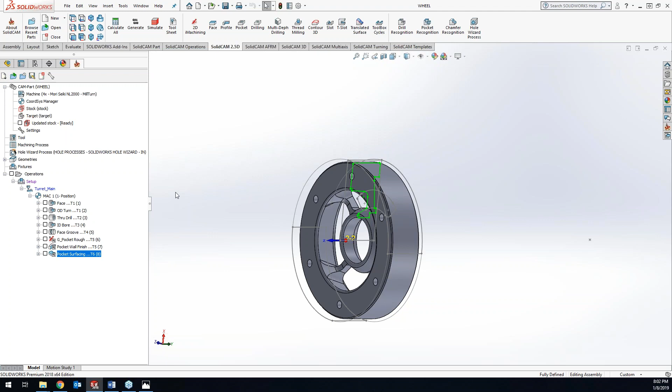Hopefully you guys still remember this part. What we did so far is we did everything on the main turret for the Mac 1 Pos 1 here, getting all this material out. I'll just do a quick run through here.

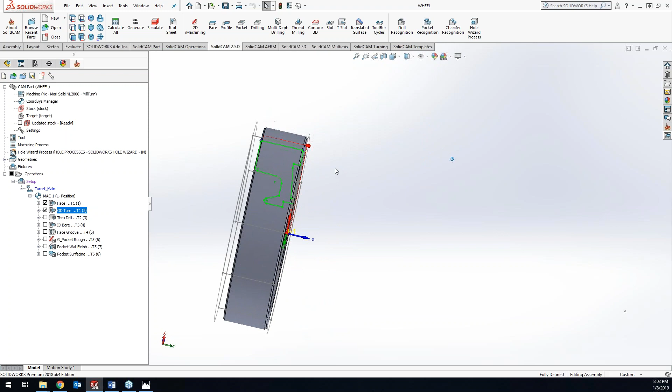We just did a basic facing operation, facing off our part. We did an OD turn around the outside. Let me get my part panned around here so you guys can get a better view. So we got the front face, OD turn. We're doing a through hole, and then we bored out that through hole.

And then what we did, let me pan this part just a little bit to the side, is we roughed and finished this counter bore, I guess you'd say, right here, using our face grooving. And then we did 3D iMachining, getting all the material out of here.

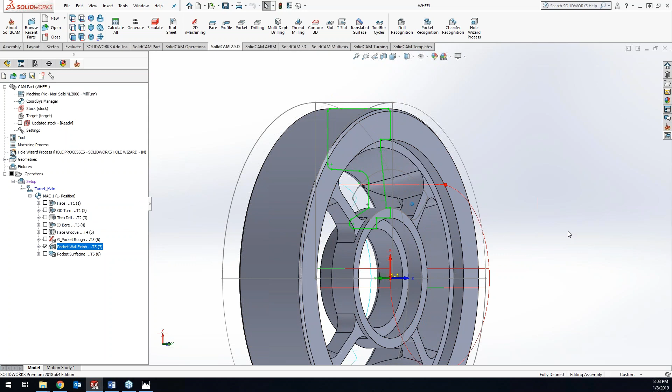Let me uncheck all this here. And then we just did a simple pocketing operation, coming in here and cleaning up these flat walls that were on here. And then did some HSS and the surfacing, going back and forth, getting that 3D surfacing in there. So if we just do a quick simulate here, solid verify.

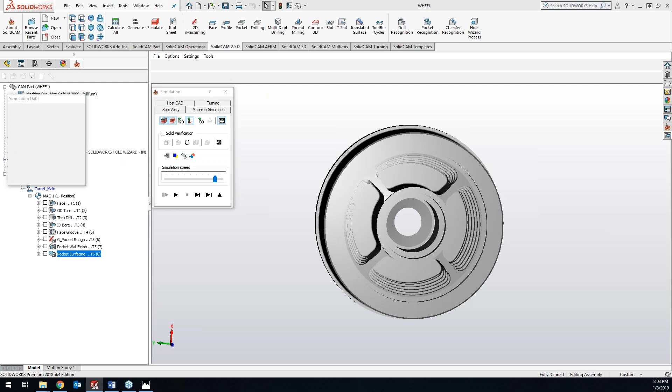Let me just check my accuracy real quick. We'll buzz through this surfacing real quick so we can see where we left off with. Hopefully everybody remembers this part.

And if they don't remember, the original video is on YouTube, right? Yes sir. Maybe we'll be nice and put a direct link in on this video to part one. That's a good idea, yeah.

I know last time we ran out of time, so we're to do the backside, so we'll get that all finished up for you guys tonight. Now...

While this is being played through, we had a great idea at IMTS. So what I'm going to start doing is implementing those ideas from Ronnie. I don't want to put you guys on the spot, but I want to put you guys on the spot. So I'm going to come up with maybe a simple prismatic part for one night class and a simple part for 3D milling on another night for a different class. And if I could have one of you guys email me that you'd be okay sharing your screen and showing your process of programming that, just so we can get a feel, you got Greg and myself, that both work at SolidCAM, but you guys are in the shop on a day-to-day basis.

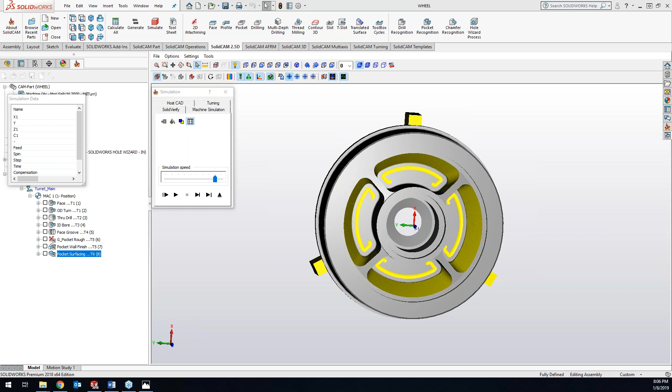Okay, so we got our part here, and we got everything finished on that front side. So basically, what we're going to be doing now is transferring it over, we can run that execute real quick here. So everything's that greenish yellow here, so we're right up to size, but we do have our blue now to take care of.

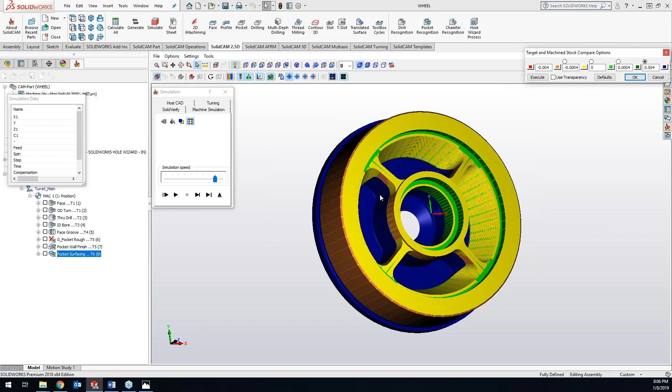So what we are going to do is transfer it over to our sub spindle. Greg, do you remember in our last class, did we set up a MAC 2 or jaws for that second side, for that second setup? I know it's been a long time. I don't believe it was, but it has been quite a long time. Yeah.

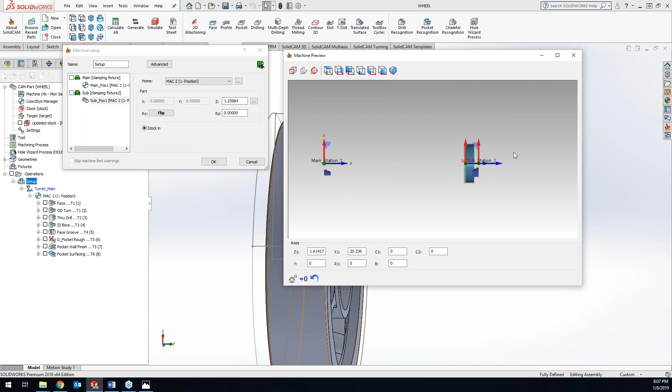So what I did, probably when Greg and I were in South Dakota, is I set up, I couldn't remember if we did or didn't, so I set up clamps for my sub spindle here. If I do a show, you can see my clamps over here. If I actually want to see the workpiece in there, I can come over here and say stock in, and this is basically what it's going to look like right here, of the jaws that I'm using and how I'm clamping onto that.

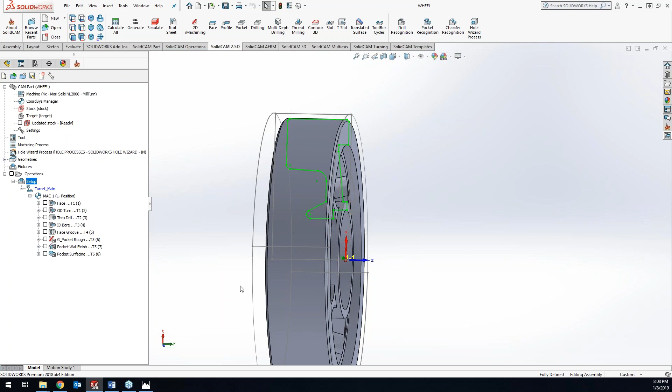Now, with that being said, let me put it back in stock for that main. Right now I only need one setup, because in my one setup I have my Mac 1 and my Mac 2 for my main spindle and my sub spindle. So what I can do is, a lot of you guys running these mill turn machines can actually create an MCO to transfer the part.

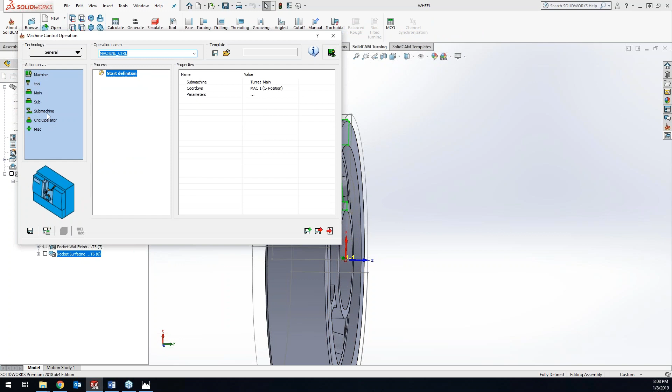Now, for those of you guys that do have mill turn machines, the MCO will probably already be in your list over here or up here, depending on how your post was set up, and the post writer would set up that MCO part transfer for you guys.

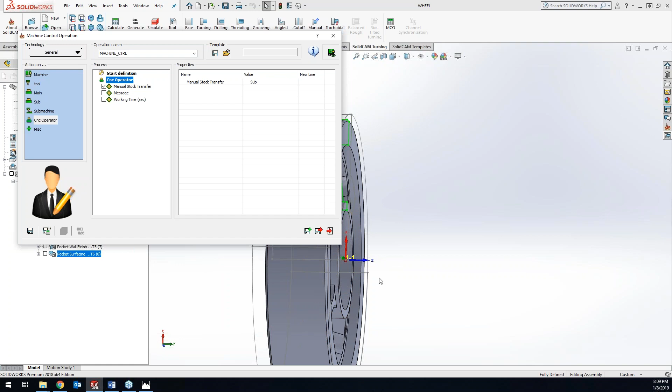So okay, so now we can just do save and calculate. So basically what that MCO is telling it is it's transferring the stock over to the sub spindle now. All right, so I haven't done this in a little while, getting out of breath here.

All right, so now what we can do is a facing, or we can do turning, doesn't really matter. And we will do it for Mac 2. So it's letting us know that it is sitting in the sub spindle.

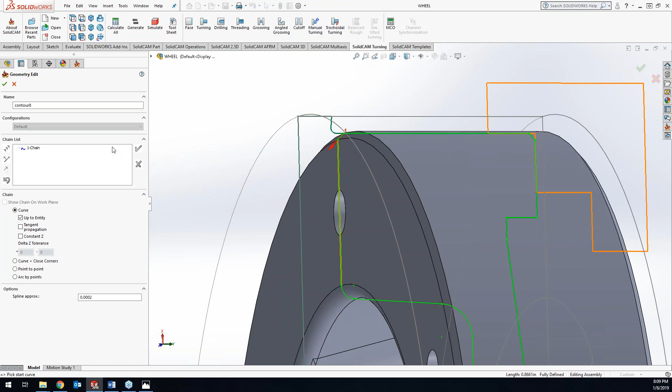And what I'll do here is grab this chamfer and straight down just to face off. Hit the green check mark. And I'm going to do my modify geometry and do auto extend to the stock.

All right, so now what we can do is create a new tool, and we'll do an external turning. I want to do a CNMG 432 C and G 4 2.

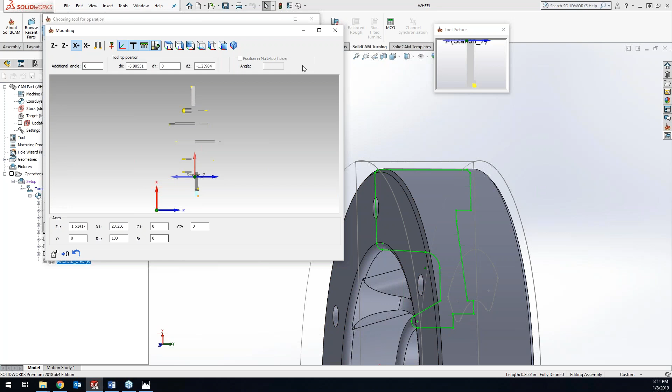And now I need to orientate it so it's going in the right direction. So I'm going to go to my mounting here and go like that. Hit our green check mark here.

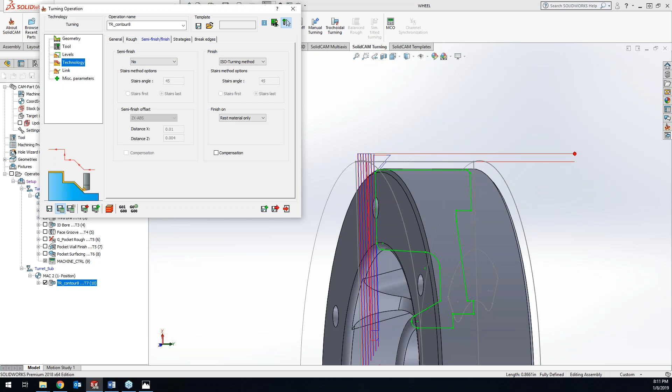Okay, so now we can go to our technology and we can tell it back face, and we can do a finish. And now should see a, whoop, well I'll show you here. I know there's one thing I just messed up on. Let's go to turning here.

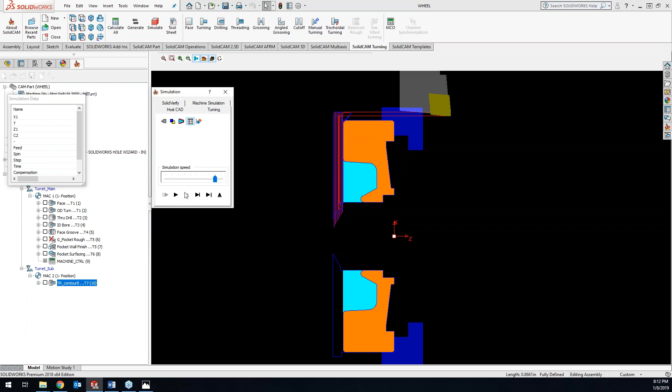And obviously, since I am working on the sub spindle, I don't want my tool coming over from the upper right corner. I want it coming from the upper left corner for clearance and whatnot. But that's an easy enough modification. Play this through here. And there we go. You can see we just wiped out our jaws right there. If we just do this in Solid Verify, yep, so that's a great indicator telling me that I've got my tool coming from the wrong side here.

So let's go to our link, and instead of right safety corner, I will do left. And now you'll see it come from the correct way, come over here and work its way over. What were we going to say there, Greg?

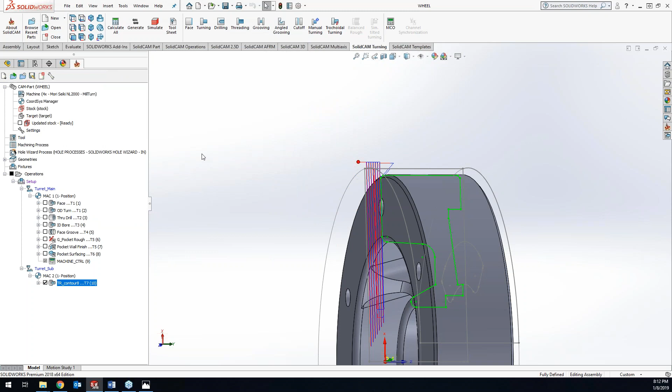What I would like to see is, since we get a lot of calls on people working on the sub spindle without that stock transfer, can you get rid of that MCO and just show everybody what it would look like if the stock hasn't been properly transferred to the sub spindle?

Excellent. So if you guys are programming and you see this square box show up, especially when doing mill turn, that means something isn't jiving with the operation list. Right now it's popping up, let me expand this so it shows me the error. It's basically saying it doesn't know where the stock is currently, the stock is not matching what the setup is up here. If you hover over the name, it gives you that contextual error message: stock is absent on this.

I forgot about that. So if you just hover over it, like Greg said, you'll be good.

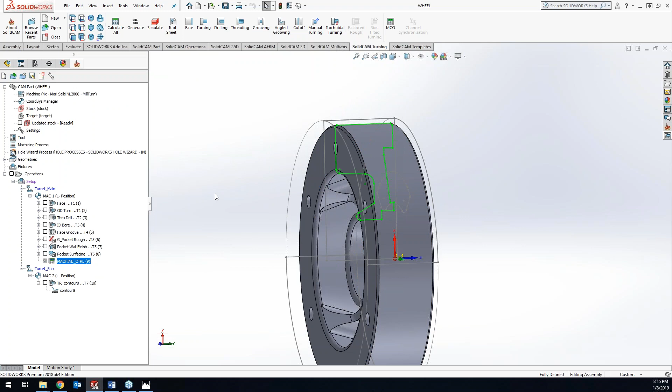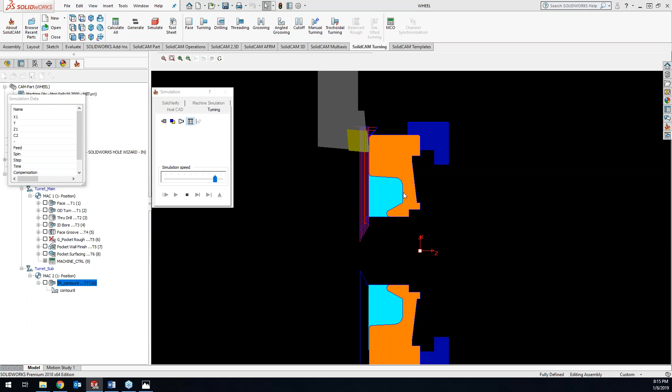Okay, so now let's see, I got to do a quick turning here to see what I have left. Okay, so I got to do my face grooving now. I got to get all this material out here, and I should be able to get that out all with one tool here. But let's try it.

So we'll do a grooving operation here, doing our Mac 2, and we'll do new. Like what we talked about in the past, the dark green line is my stock, or my remaining stock that I have left over. So what I'll do is chain from right here and chain up to right here, so I'm going to get that rest material out of there.

Okay, and go to our tool. We will use an external grooving tool, let's just do a 0.125. That looks fine. Let's just do 100 thou. Looks good, good, good. And let's just do insert only. And we want pointing the opposite way.

So you can see up here, I can see my insert much better now. And like I said before, if you guys have a whole lot of tools in here, it gets pretty cluttered up pretty quickly. So you can actually just hide all the tools, and then you can zoom in and you can actually see your insert and which way it's going.

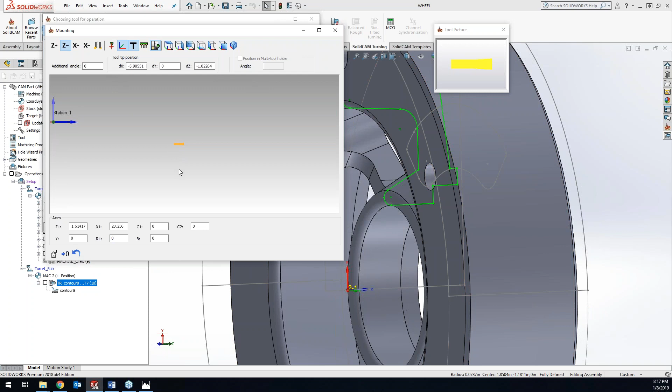So if you guys ever need to get in there and remove all the extra tools, or even the machine if there's one in there, you can turn those off right here. And if you can't find the insert you're looking for, you can hit the little crosshairs icon to zoom directly to that tool. So let's zoom out here, we're kind of off in La La Land right here. Gets you a nice zoomed in view.

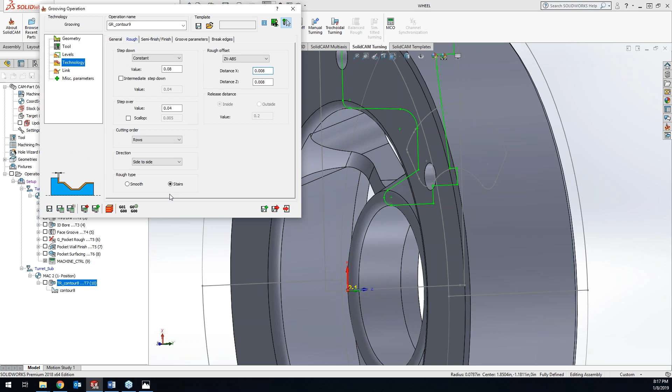Turning. So you can see my remaining stock still there. If I just hit the play or single step button once, you can see the blue is the area that I need to get rid of, and I'm just doing a stair method, just chunking this material out of there.

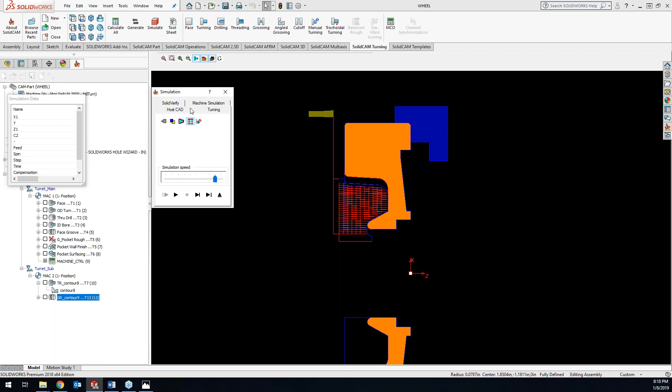Now, obviously I can probably go much deeper than that 40 thou that is there, and it's coming all the way down to leave that 8 thou on the X and Z for one nice finish pass. And there's our finish pass going all the way around. Let's play that through in SolidVerify for you guys.

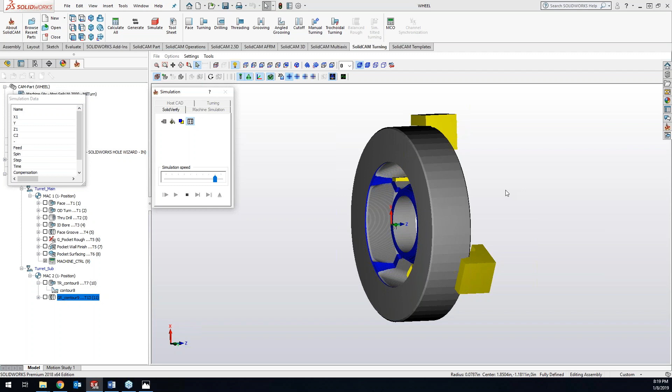Now, if you guys see a couple more buttons in here out of the ordinary, all the night classes going forward will be run in SolidCAM 19. Once we start getting that stuff released for you guys - I know Ronnie, you work on some pretty complex parts, but if anybody else is looking to get to, like if you're running a 3-axis machine, we're ready for you. We're still in the process of getting the simultaneous 5-axis stuff 100% dialed in for the post processors.

And we got another finish pass. So let's just verify it real quick. So we're green, yellow, we're all up to size. The only thing left is our holes.

So let's hop out of here for a second, turn off our toolpath. Now, since we are using these holes and they are off-centered, I cannot use my drilling, because drilling inside of the turning is just going to go right off the center line.

So I need to use my live tooling for this. Easy enough. What I'm going to do is just do a 2.5D, and we'll do a drilling. And what I need to do is, since I'm working on my sub, I need to switch it over to Mac 2, but I need my Z pointing straight out for my Mac 2 position 2. And what I'll actually do here is just do new geometry.

And I'll just grab that one hole for right now, and we'll do select. Grab a spot drill here.

Go to my technology, levels - sorry. Drill depth is this face right here. And then what I'm going to do is a diameter value, which is the 267, and I'm actually going to make that 277, just for a 10 thou edge break.

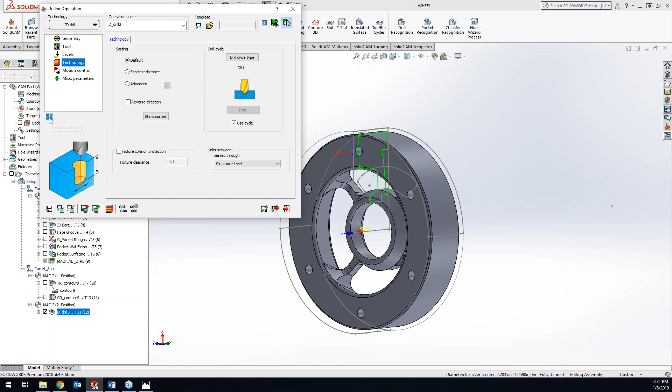And just do a simple drill, save and calculate. And now what I'm going to do is just do a simple transform around 4-axis. So I will say include original. We have 1, 2, 3, 4, 5 steps, which is what, 60 degrees.

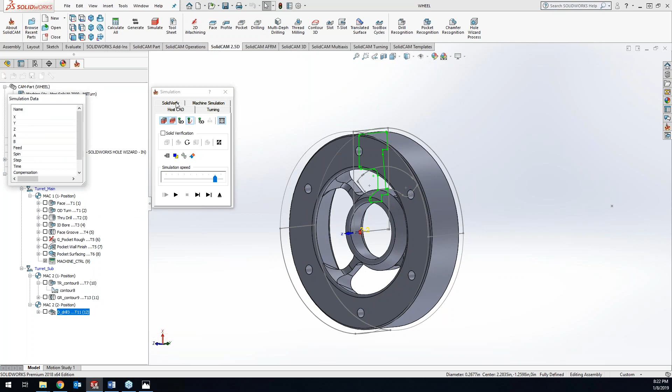Insert, and you'll see I have my little purple dots all lined up here. Hit OK. And let's do a solid verify here. And you can see our spot drills going all the way around.

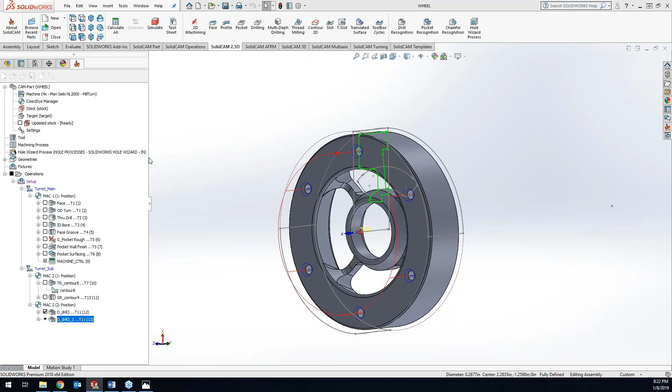So the only thing I really have left after this is the drilling. And what I can do is just make a copy of what I did, and we will switch the tool over. Add a drill.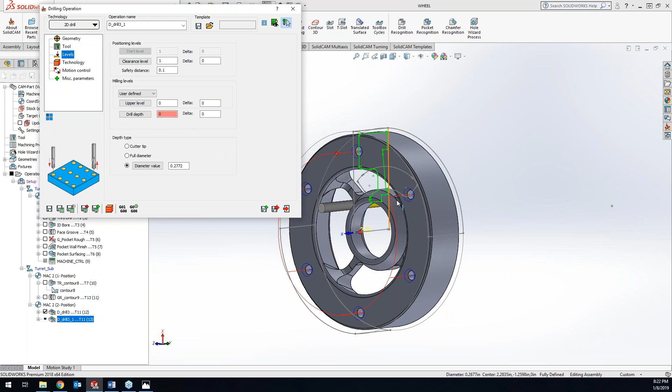Highlight that 1/4 inch, and I'll just select on the edge. My numbers will populate for me, pointing in the right direction. And levels now are going to be a little bit different. Looks like they're blind holes, so I will just do drill depth right to that drill point, and we'll say tip.

And let's do a pecking. Slide these over here. 100 thou.

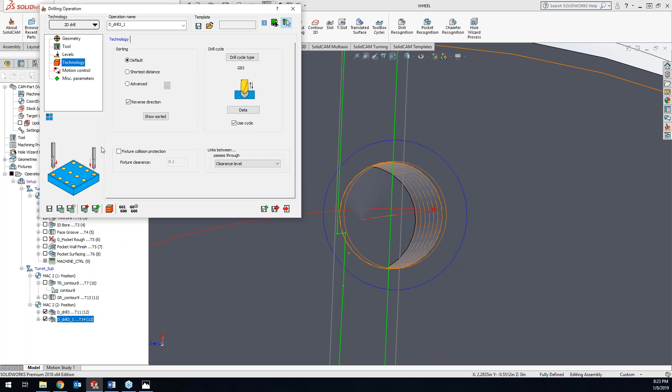And one thing I'm going to do is the reverse direction. This doesn't matter if you guys are just doing one-off parts, but if you're into production, basically what it's going to do is start here with the spot drill all the way around, then change tools and leave off right there, starting at the ending point of the spot drill, and start drilling back to the beginning. So that's one option for you guys to save time, if you're doing high production where every little second counts - that's a helpful thing to have.

Okay, save and calculate. Do solid verify here.

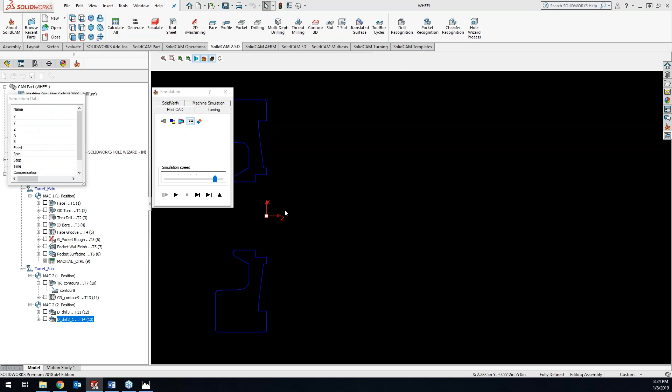Now, for the guys that haven't seen this before, anytime you're doing any milling or live tooling work, it's not going to show up correctly in the turning dialog, because you can see right here it's projected through a slice. We have no way of rotating this or anything like that. So if you see this and think, wait a minute, what's going on here - switch it over to solid verify, and then you're going to see everything correctly.

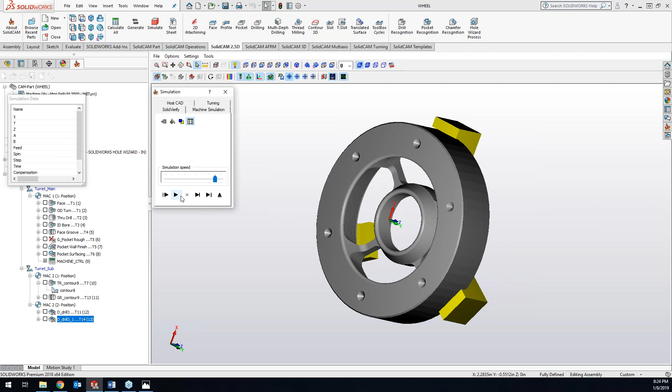There we go. Wait a minute, was that the reverse order? Let me play both of those through and make sure that took.

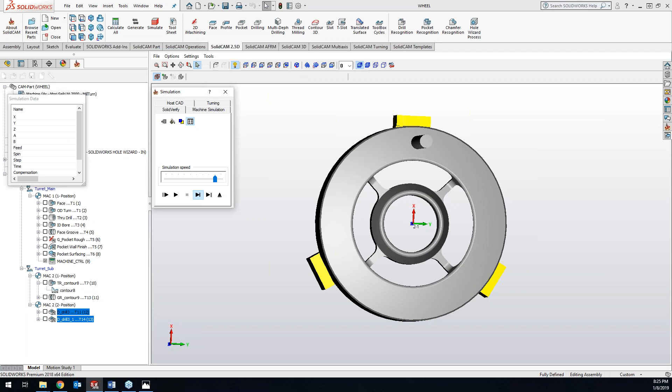Single step it through here. Now this was a customer's part file that they did want to see done. All right, so we're going counterclockwise.

No, it didn't reverse it. Take a peek here.

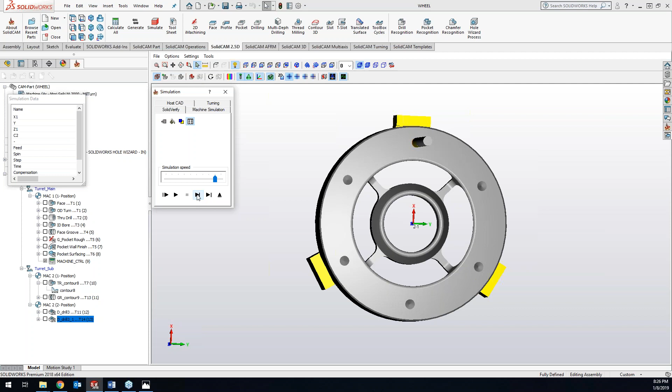Hey, Kevin. Yeah, the reverse direction is for if you're selecting all those holes as geometry, but you've only selected one hole. Oh - so there's nothing really to reverse. You need to reverse your transformation. Yes, that's right. Great point. Okay, so yeah. So what Greg is saying is when I picked my geometry, I only picked one hole. I didn't actually pick all these holes. I did a transform, so if I wanted to do that, I would have to reverse my transform.

Thank you for that, Greg. But like I said, emotional support. Yeah.

Let's just play this through one last time just to make sure we have everything. And while this is pulling up here, guys, any questions? So we should have a fully finished part here now.

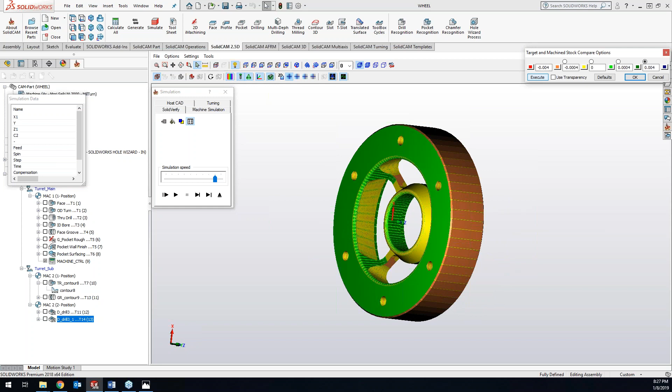Please show a no drag on the groove for finish, says Ronnie Kidder. No drag.

This one here. No drag. Which would Ronnie? I'm guessing if you go to single, are you talking like doing a single down?

So we have single, and I can switch it from side to side, from middle to outside. I got a couple different options here where I can go to constant, switch it over to columns, that way, and I can do from side.

Well, he's talking about the finish pass. So let's go over the finishing options that are available. So, okay, no drag.

I'm just trying to think. Try down only. You got it, Ronnie.

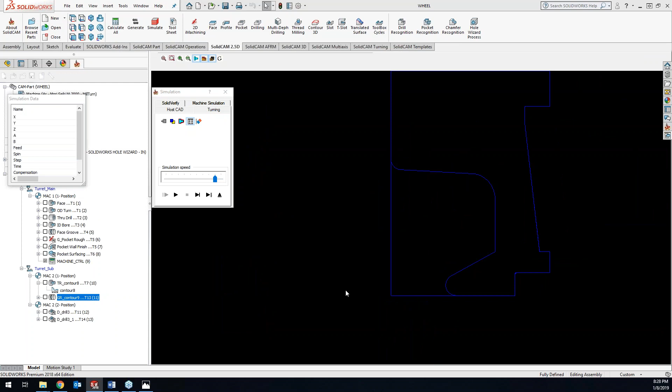Let's go to turning. I thought he was referencing the time they spent with you out in Chicago and your penchant for dresses. It's a good thing Ronnie wasn't there when. Yeah, we won't talk about that. Nope, that's good, Greg, says Ronnie.

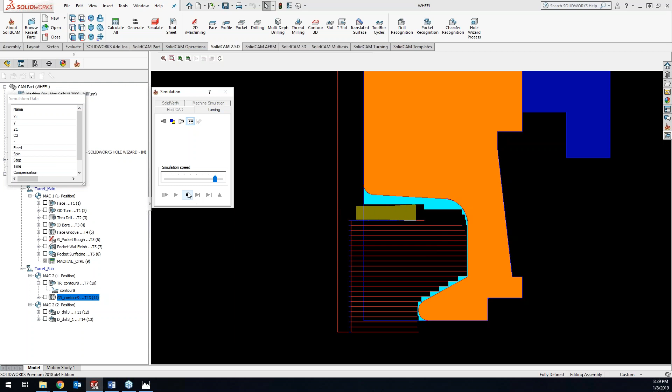All right, getting close here. I'll slow down the simulation a little bit. Is that where you're looking for, Ronnie? I'm just not sure what you mean by no drag. Well, heck, hit that one on the head there, Greg.

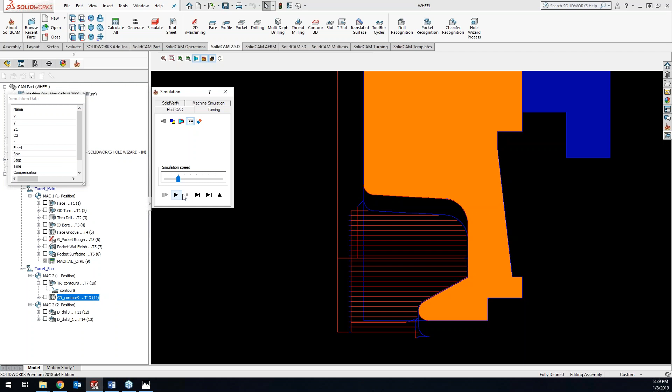Perfect. So I guess with that being said, we do have a couple of different options here. We can do a staircase method. You can kind of see what it's doing here in the picture, working its way over, then just moving in the down motion, and then to the left.

We have the groove method, so it's kind of starting from the center and working its way to the outside edges. I'm guessing this would probably be what you're looking for as well, Ronnie.

Or we also have the down only. It's cutting, I would say, unless I'm missing something, but down only and the groove method look very similar. We also have an advanced down only, and you can set it up so you can switch up your grooving parameters and your plunge conditions. So as you're plunging, you can have your spindle reduced by 100%, or reduced by 75%, or your feed reduced, stuff like that.

So a lot of different options here for you guys. And if you guys do have more questions about this, definitely check out the night class we did on grooving. But we'll just leave it at down only, to get a nice good finish in here.

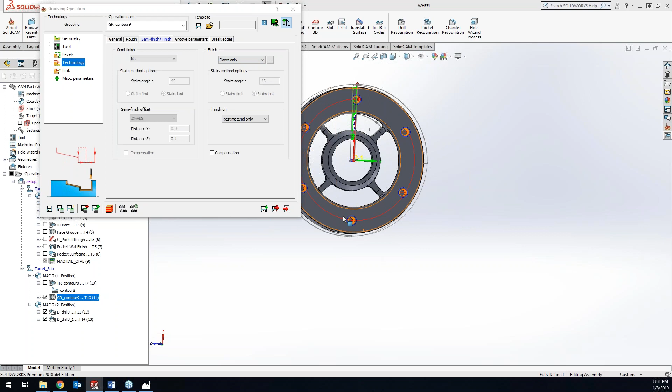And I guess if we were to run this part on the floor, I would not be doing 0.040 step downs. I'd do like 150, getting that material out of there as fast as possible.

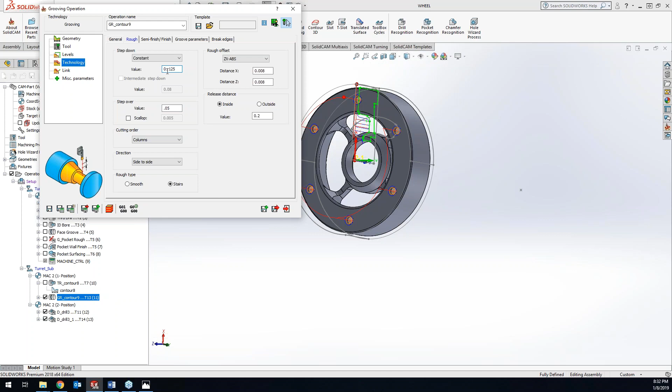There we go, turning. There we go, that looks a little better. We're going full out roughing.

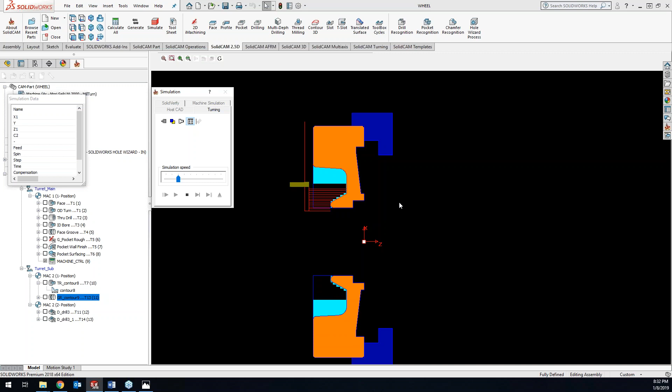All right guys, any other questions that I can answer? Anybody interested in doing? Yeah. Oh, go ahead. I was going to say, well, we touched on it briefly, but maybe a little more in depth on why we went to Mac 2-2 when it came to the milling tools.

Yes. Pause this. Maybe.

Well, while you're working on that, for those guys wondering why we went to a sub position for the milling tools — anytime you're working with a driven tool, one that's going to be spinning itself instead of the spindle doing the turning, you want to orientate that tool counter to the z-axis. So you want it opposing that z-axis. What that does within the software is it aligns that tool properly.

You're still going to have to go into the mounting and make sure that in your tool table, the tool is mounted correctly. But from the programming side of things, anything that's going to be a milling tool has to come in opposing that z-axis to get the tool path to come out right. So what we do is create that secondary sub position, so we can align that tool properly and achieve that tool path.

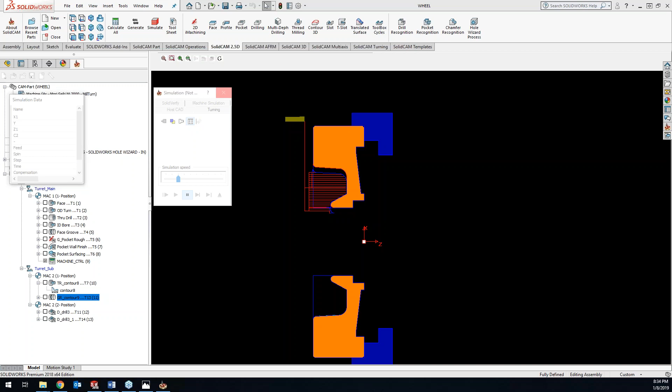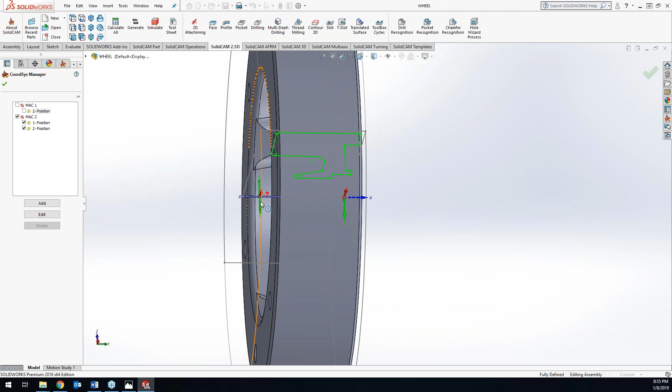There we go. All right, so let's do a CoordSys Manager here. Let's uncheck the one, and you can see. I'm trying to show it so it's not showing the Mac one. Position one.

But you can kind of see we got the 2-1 and the 1-1. The Z's are pointing straight out, which for this machine they need to be for the main and sub spindle. But our secondary live tool, like Greg was talking about, has its Z pointing out towards our holes, which are defined right there. So yeah, thank you for filling that in, Greg.

Trying to think of anything else that I could show you guys just on this specific part. Like I said, this was a customer's part file.

Ronnie's asking if we have another class on SolidWorks or SolidCAM 2019 coming. Oh, let me tell you, Ronnie, we got all kinds of classes coming up on 2019. A lot of great stuff has come out.

Especially I think one of the bigger ones is the new simulator that's come out. But yes, we are going to go through 19 with a fine-tooth comb, just because they added a lot of milling functionality in there for you guys. So we'll be going through all the steps of that, and actually it's probably going to be a month to month and a half's worth of night classes for you guys for 2019, because there is quite a bit that they added in there, and a lot of really cool stuff.

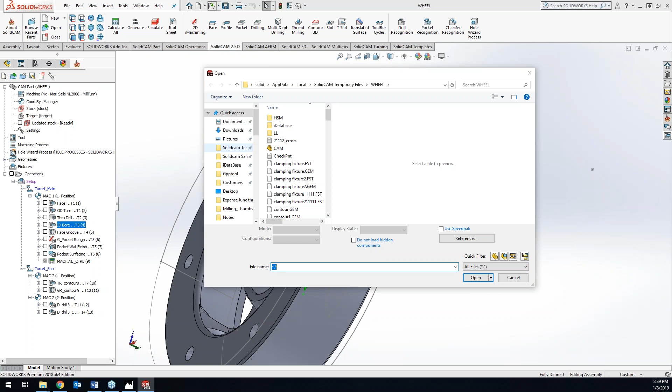So next week we are going to be programming another part file. Let me just see if I have it real quick. I can show you which one it is. Bring this over on a side screen so you guys don't have to see me navigate through here. Drag this. I close out this part here.

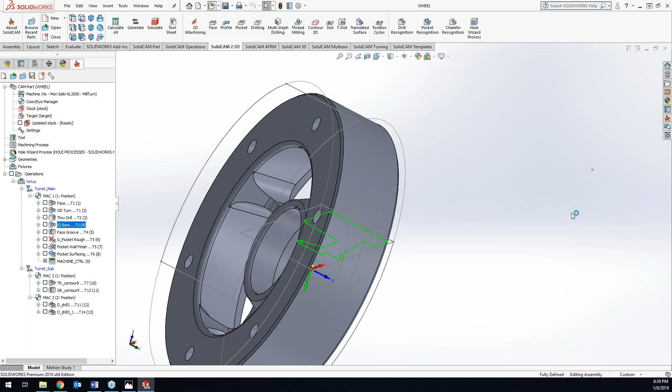We will be programming this part, and I say we because I'm definitely going to need Greg's expertise in this area as well, from start to finish on a Swiss machine for you guys. I know a lot of you guys don't have Swiss, but there's a lot of functionality that carries over from the mill turn over into the Swiss side for you guys, and you guys can see a lot of differences or commonalities as well programming this part on the Swiss.

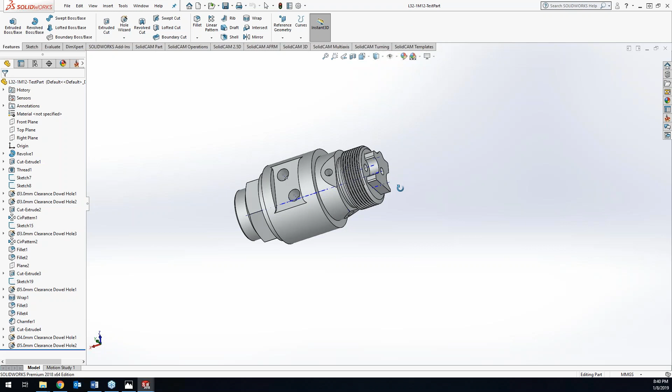So this is a part that Greg and myself and Daniel cut live on site with the customer to kind of prove out all the axes, and I figured it's a good part to kind of go through with you guys as well. We got some wrap functionality, we got some angle head, we got some live turning up here. So, and this will be all done on a Citizen Swiss machine for you guys.

So hopefully you guys are excited about that. But yeah, for the eagle-eyed viewers out there, in the part name, we'll kind of give away what machine it's going to be on. L32. And then yeah, hopefully by then we'll be ready for 19 for you guys.